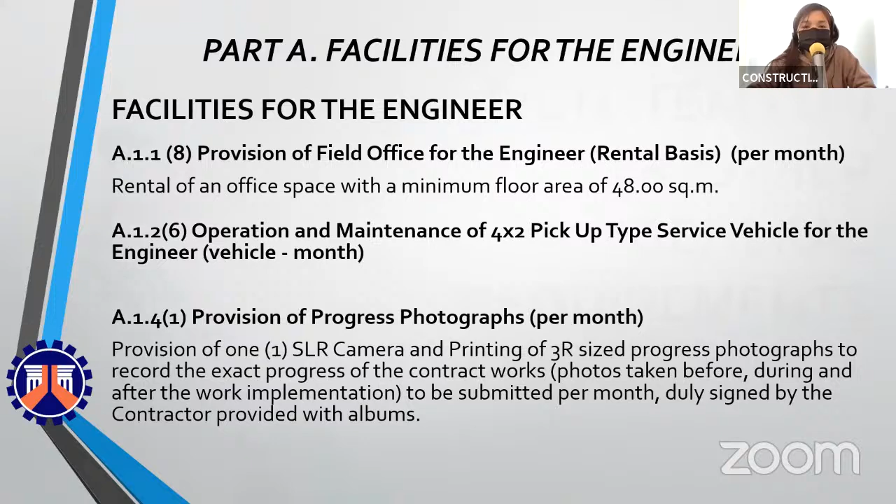Common items in Part B, other general requirements: B.31, permits and clearances per contract ID number 23D00221 and 24D00104; B.51, project billboard, signboard, each; B.71, occupational safety and health program per month.

B.81, traffic management month per contract ID numbers 24D119 and 24D120; B.9, mobilization, demobilization, lump sum; B.20, temporary fence per contract ID number 24D104; B.24.1, general scaffolding, shoring, and netting per contract ID 24D104.

Showing you the DPWH standard project billboard.

Minimum material testing equipment for small contractors per contract ID numbers 23D222, 23D223, 23D224, and 24D120. Showing you the minimum materials testing equipment for small contractors.

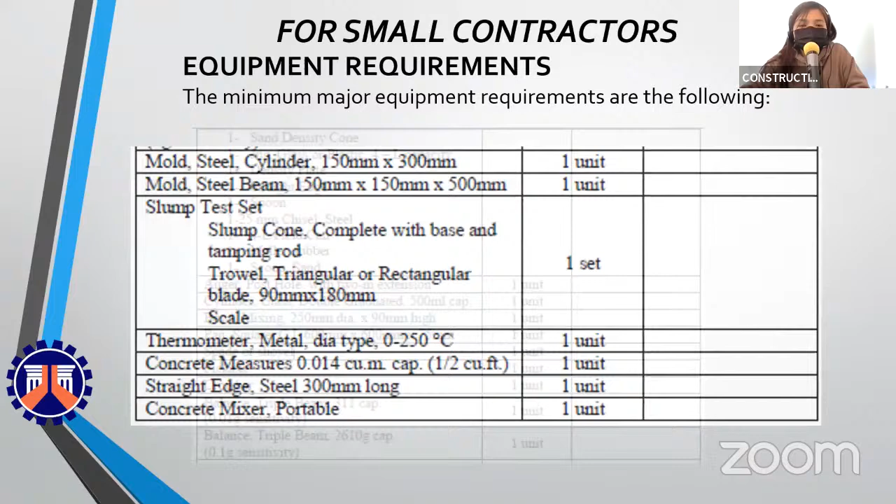For minimum material testing equipment for medium contractors, per contract ID numbers 23D221, 24D104, and 24D119. Showing you the minimum materials testing equipment for medium contractors.

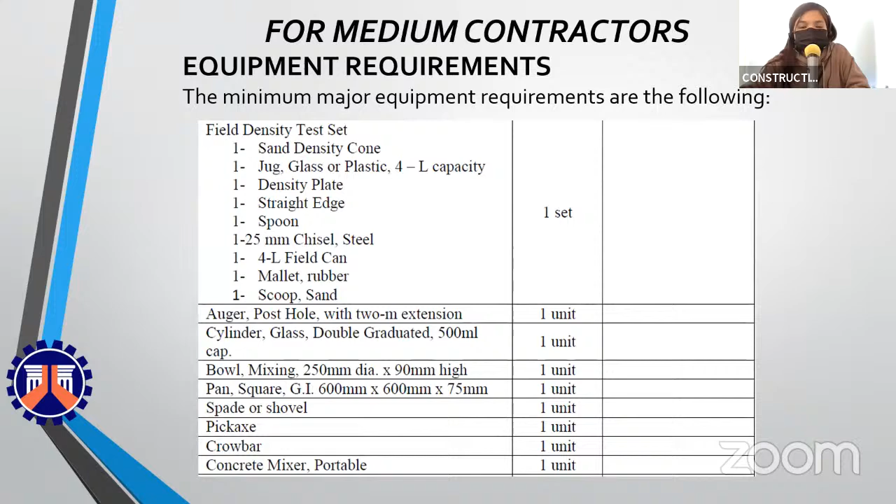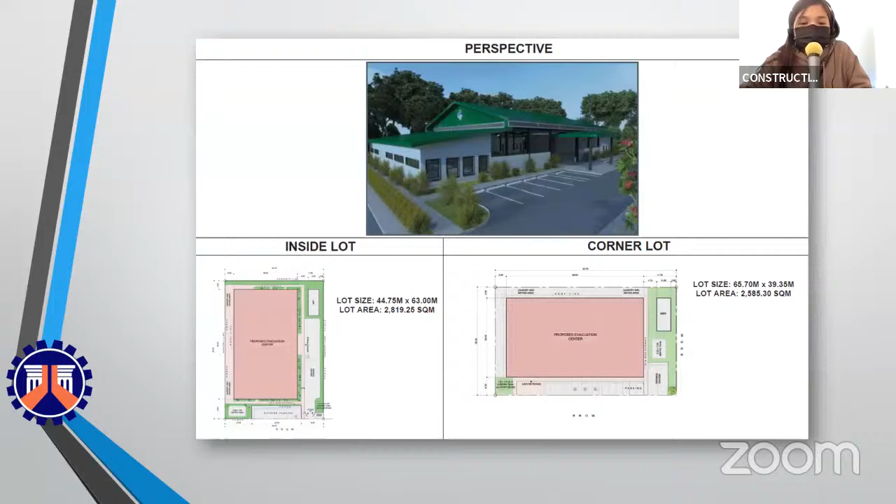Per contract ID number 23D00221, showing you the perspective and the plan for inside lot and corner lot. Ground floor plan.

Scope of work. The construction project entails the development of a permanent evacuation center or multipurpose covered court incorporating various facilities and features, including a laundry and drying area, material recovery facility, cistern tank, mess hall equipped with a kitchen, administrative office, storage area, and a play area, accompanied by a breastfeeding room. Additionally, the project will integrate a conjugal space, distinct male and female toilet and bath facilities with accommodations for persons with disabilities, a clinic, and a prayer room.

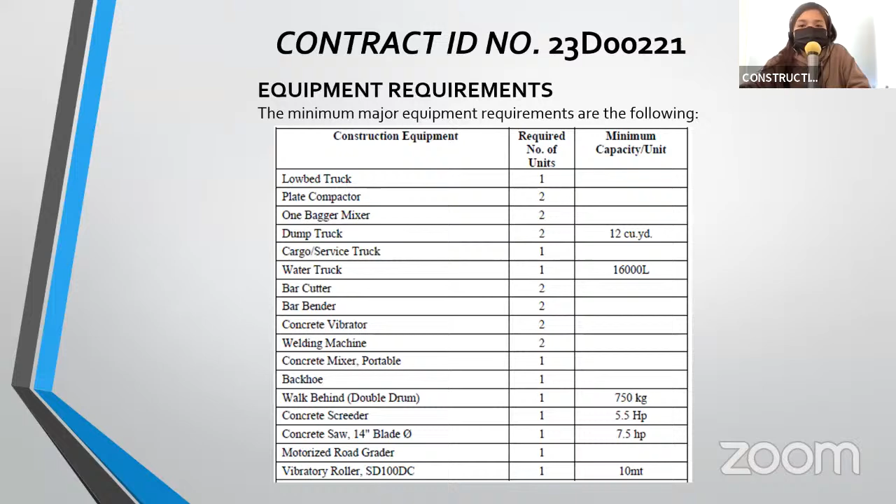Moreover, the project will be enhanced with a fire protection system. Equipment requirements. Showing you the minimum major equipment requirements. Manpower requirements.

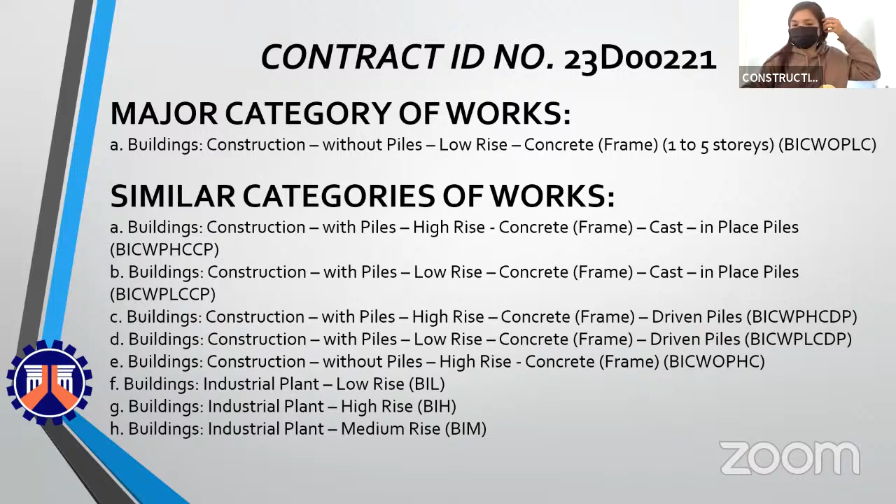The minimum work experience requirements for the key personnel are the following. The approved budget for the contract is 42,554,475 pesos and 98 cents. The contract duration is 240 calendar days. Showing you the major category of works and similar categories of works. The source of fund is FY 2023 RA 11936, extended regular 2023 continuing.

For contract ID number 23D00222, for structural improvement and construction of evacuation centers in General Nakar, Quezon. Showing you the perspective, inside lot and corner lot. Ground floor plan.

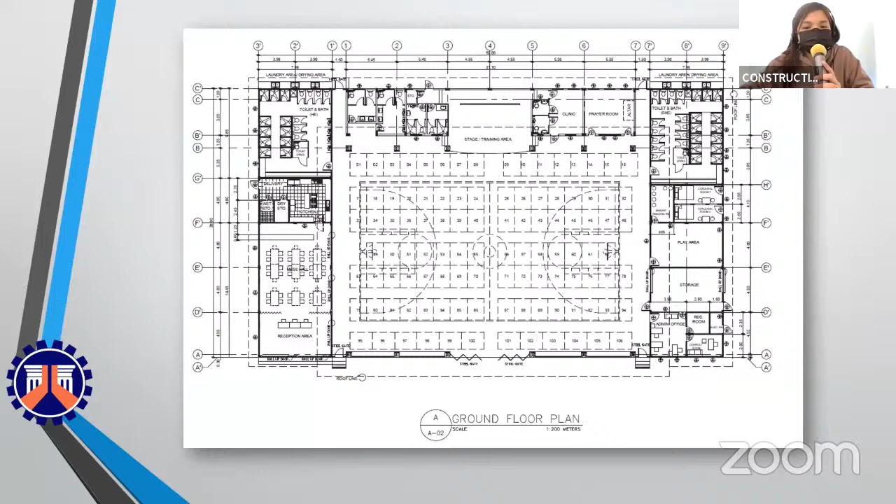Scope of work. The scope of works includes architectural finishes such as painting both exterior and interior walls, installing both glazed and unglazed tiles, applying a non-slip paint finish to the floor, and installing lighting fixtures. Setting up a ceiling using fiber cement board on a metal frame, installing reflective insulation, and laying Portland cement concrete pavement. Additionally, installation of a fire protection system and a generator set with a dedicated generator room are included.

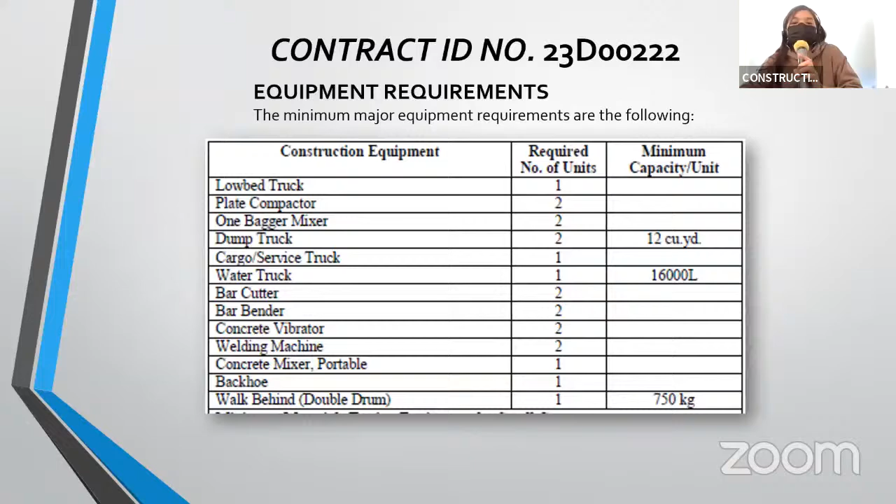Equipment requirements. The minimum major equipment requirements are the following.

Manpower requirements: the minimum work experience requirements for the key personnel are the following. The approved budget for the contract is 9,278,452 pesos and 71 cents. The contract duration is 120 calendar days.

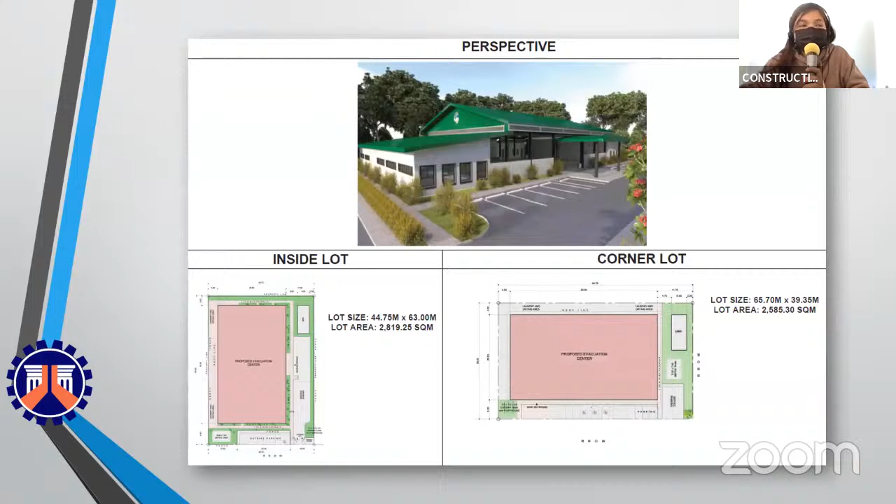Showing you the major categories of works and similar categories of works. The source of fund is FY 2023 RA 11936, extended regular 2023, continuing. For contract ID number 23D00223, structural improvement of public buildings and construction of evacuation centers, Padre Garcia, Batangas. Showing you the perspective, inside lot, and corner lot, and the ground floor plan.

Scope of work: the scope of works includes architectural finishes such as painting both exterior and interior walls, installing both glazed and unglazed tiles, applying a non-slip paint finish to the floor, and installing lighting fixtures, setting up a ceiling using fiber cement board on a metal frame, installing reflective insulation, and laying PCCP. Additionally, installation of a fire protection system and a generator set with a dedicated generator room are included.

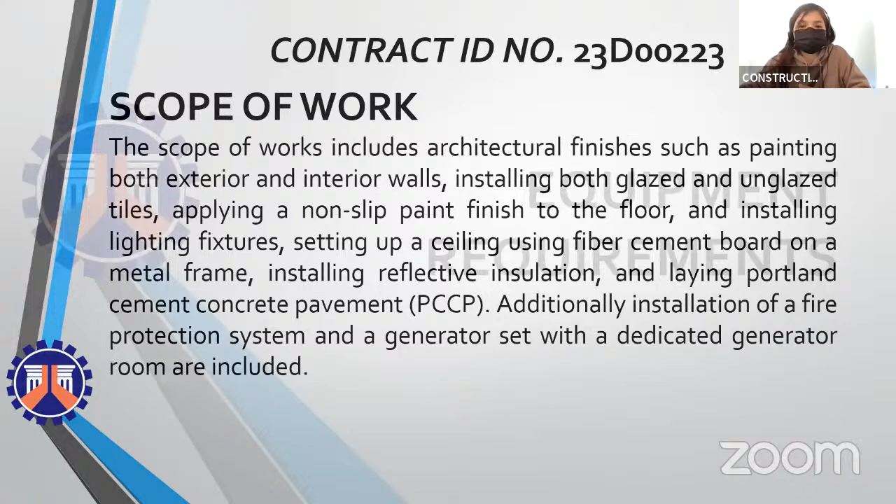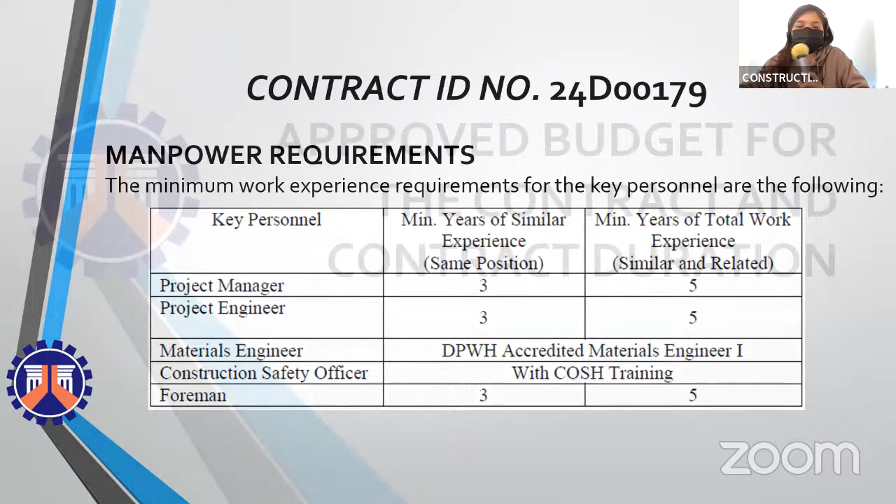Showing you the minimum major equipment requirements. Manpower requirements: the minimum work experience requirements for the key personnel are the following. The approved budget for the contract is 8,032,964.92. The contract duration is 120 calendar days.

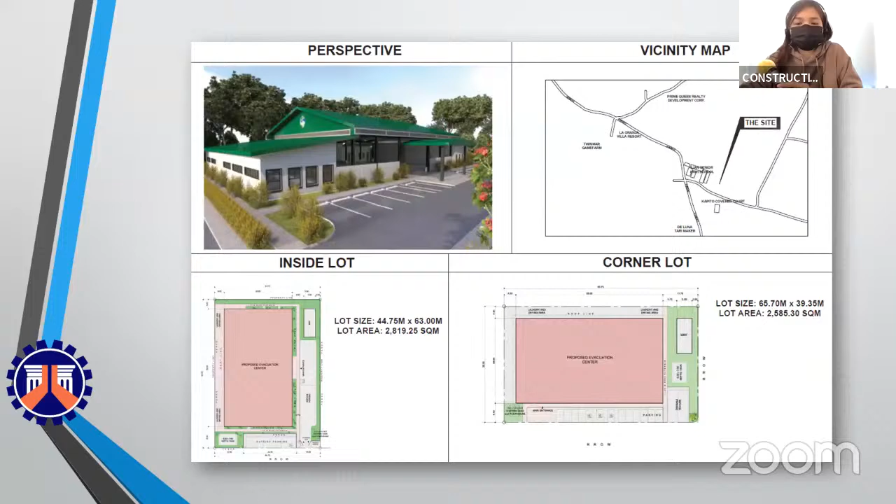Showing you the major categories of works and similar categories of works. The source of fund is FY 2023 RA 11936, extended regular 2023, continuing. For contract ID number 23D00224, structural improvement of public buildings and construction of evacuation centers, Lian, Batangas. Showing you the perspective, vicinity map, inside lot, and corner lot, and the ground floor plan.

The scope of work includes architectural finishes such as painting both exterior and interior walls, installing both glazed and unglazed tiles, applying a non-slip paint finish to the floor, and electrical works such as installing lighting fixtures, panel board, and wirings. Setting up a ceiling using fiber cement board on a metal frame, installing reflective insulation, and laying portland cement concrete pavement. Additionally, installation of a fire protection system and a generator set with a dedicated generator room are included.

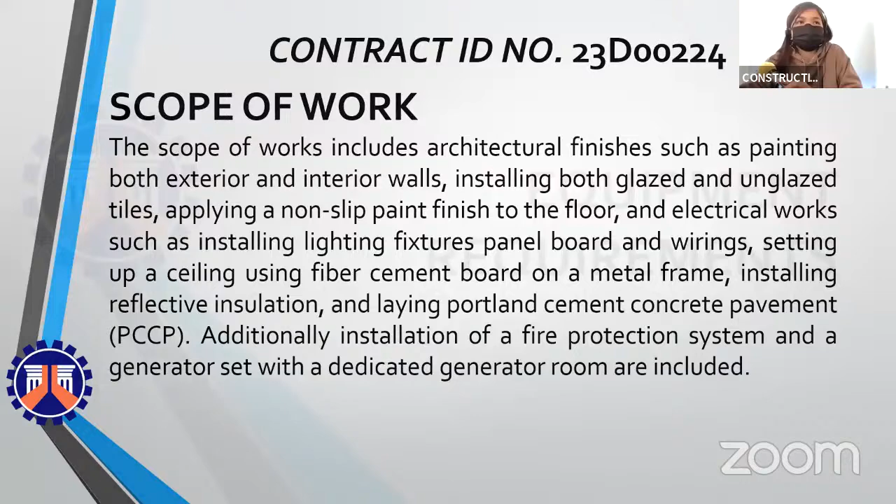Equipment requirements: the minimum major equipment requirements are the following. Manpower requirements: the minimum work experience requirements for the key personnel are the following. The approved budget for the contract is 7,741,041 pesos and 39 cents. The contract duration is 120 calendar days.

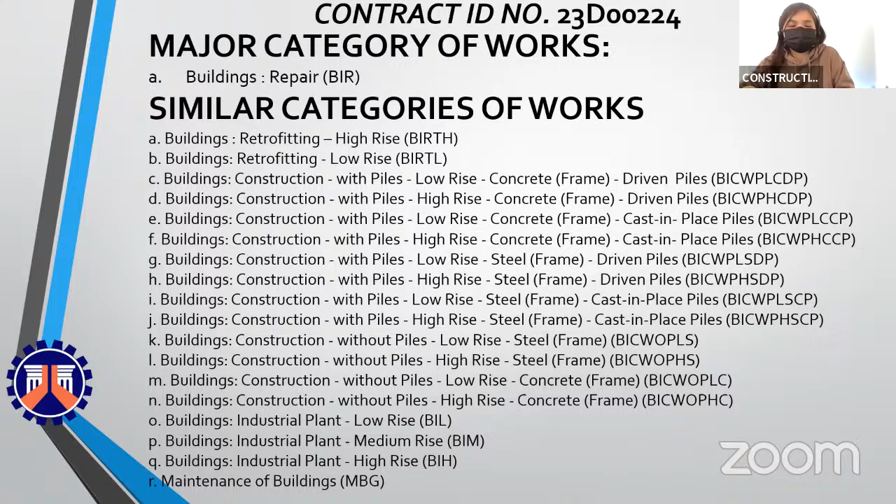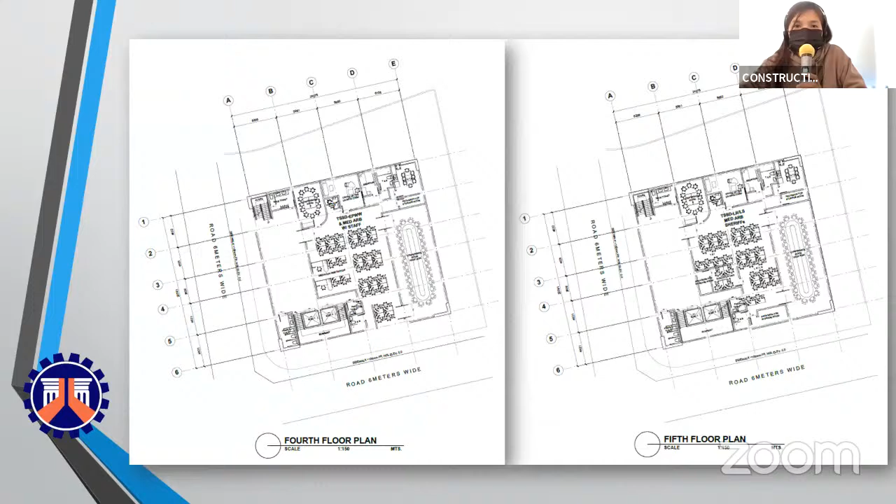Showing you the major categories of works and similar categories of works. The source of fund is FY 2023 RA 11936, extended regular 2023, continuing. For contract ID number 24D104, the construction of DOLE Regional Office IV-A building in Cabuyao City, Laguna. Showing you the basement plan, ground floor plan, second and third floor plan, fourth and fifth floor plan, sixth floor plan and roof plan.

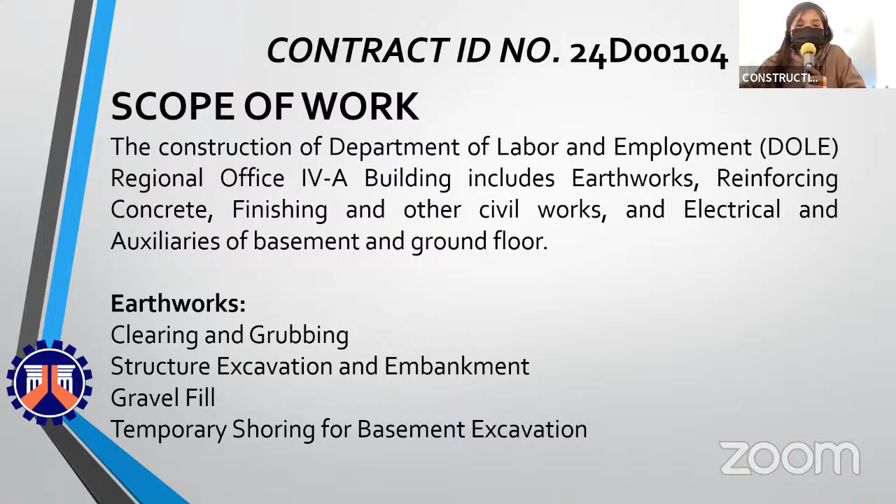Scope of work: the construction of Department of Labor and Employment Regional Office IV-A Building includes earthworks, reinforcing concrete, finishing and other civil works, electrical and auxiliaries of basement and ground floor. For earthworks: clearing and grubbing, structure excavation and embankment, gravel fill, temporary shoring for basement excavation. Mat foundation, shear wall, retaining wall, basement and ground floor columns and beams, ground floor slab.

For plumbing: septic tank and cistern tank, basement floor and ground floor sanitary line and water line, rough-ins. For electrical: basement floor and ground floor electrical rough-ins.

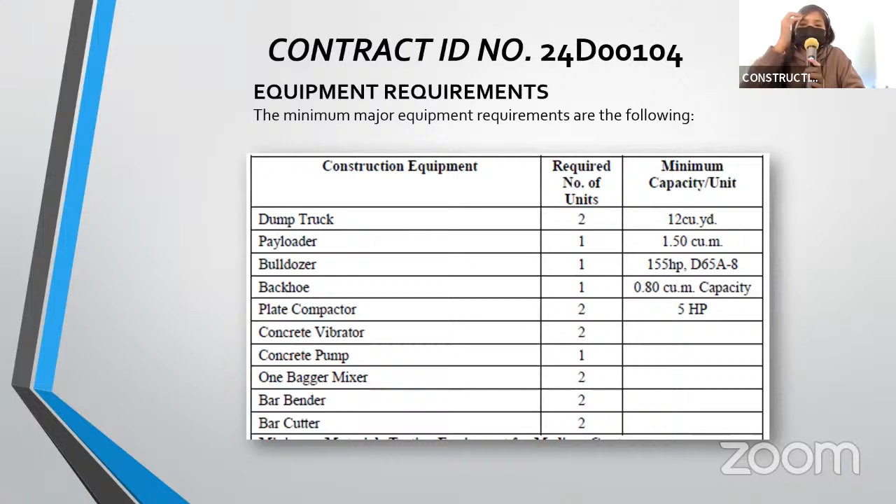Equipment requirements: the minimum major equipment requirements are the following. Manpower requirements: the minimum work experience requirements for the key personnel are the following. The approved budget for the contract is 48,250,000 pesos, and the contract duration is 300 calendar days.

Showing you the major category of works and similar categories of works. The source of fund is FY 2024 GAA for DPWH Infra Program. For contract ID number 24D00119, Daang Maharlika LZ K0135 plus -475 to K135 plus -315 and K135 plus -268 to K135 plus 596.

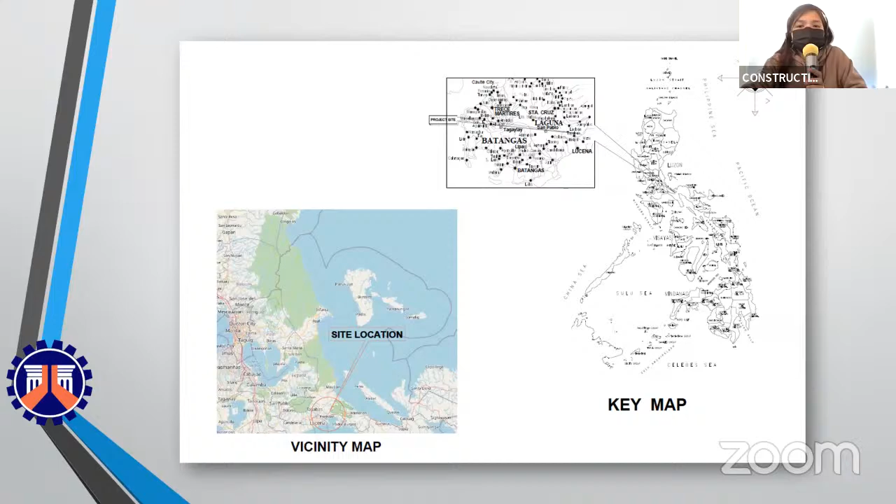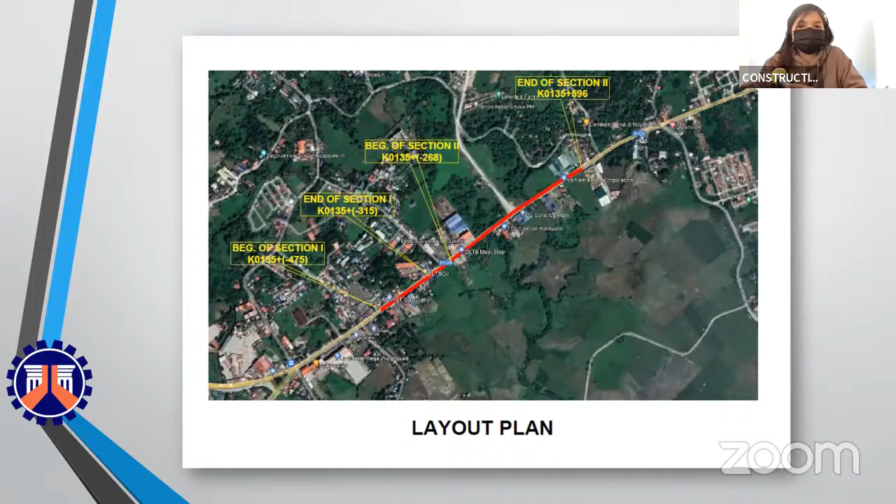Showing you the vicinity map and key map, the layout plan, and the typical roadway section.

Scope of work: asphalt overlay of two-lane road, emulsified asphalt, bituminous concrete surface wearing course, hot laid, bituminous concrete surface binder course, hot laid, bituminous concrete surface with anti-rutting additive, hot laid, and installation of reflectorized thermoplastic pavement markings, white and yellow.

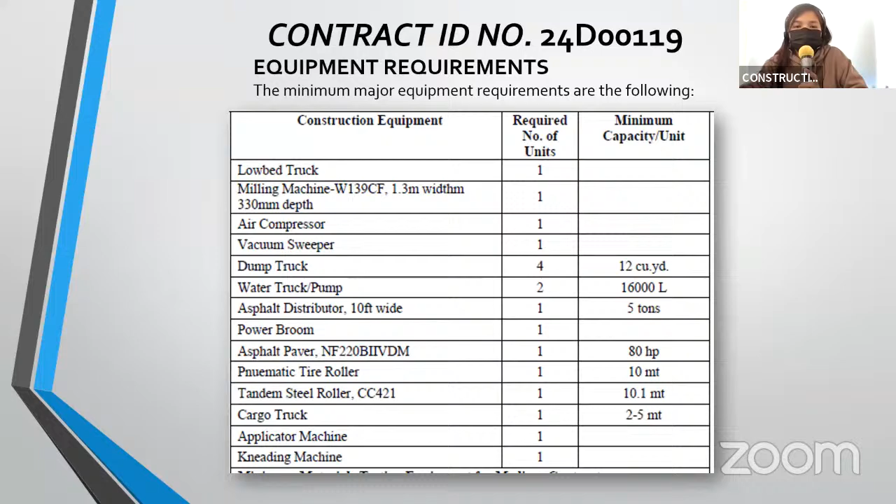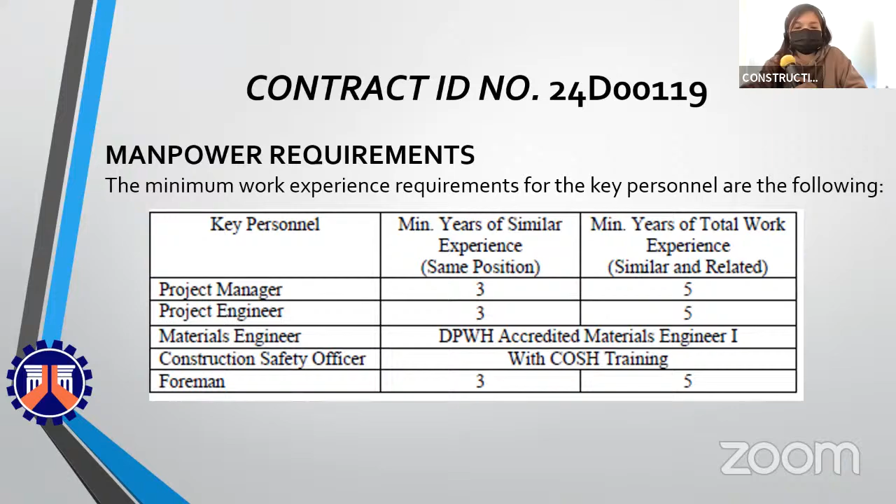Equipment requirements: the minimum major equipment requirements are the following. Manpower requirements: the minimum work experience requirements for the key personnel are the following. The approved budget for the contract is 42,742,745 pesos, and the contract duration is 120 calendar days. Showing you the major category of works and similar category of works.

The source of fund is FY 2024 GAA for DPWH Infra Program. For contract ID number 24D00120, Daang Maharlika LZ, kilometer 140 plus 527 to kilometer 140 plus 950.

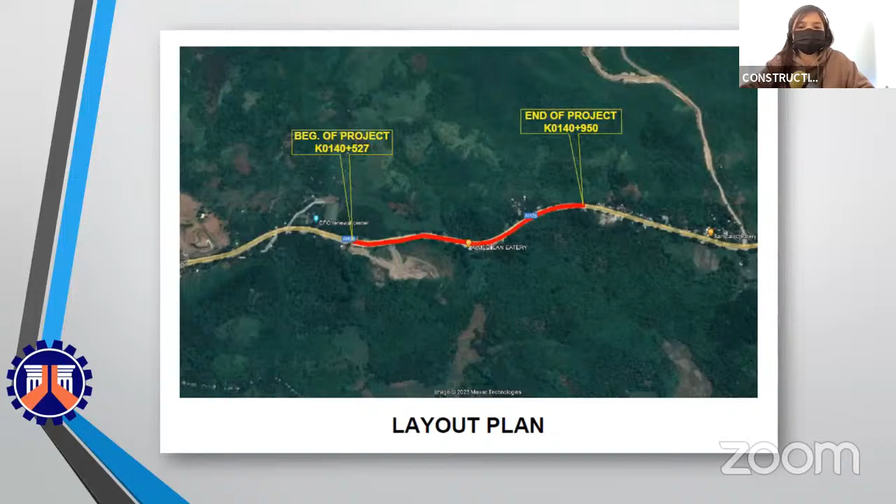Showing you the vicinity map and key map, layout plan, and typical roadway section.

Scope of work: asphalt overlay of two-lane road, emulsified asphalt, bituminous concrete surface wearing course hot laid, bituminous concrete surface binder course hot laid, bituminous concrete surface with anti-rutting additive hot laid, and installation of reflectorized thermoplastic pavement markings, white and yellow.

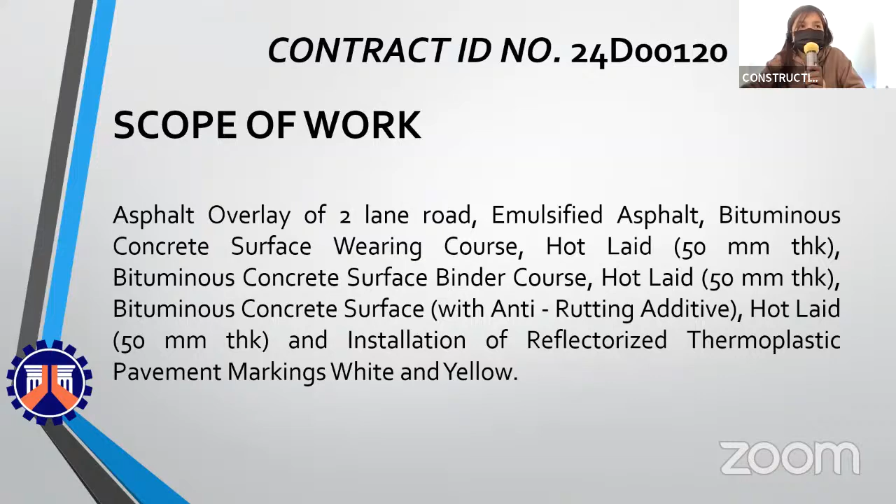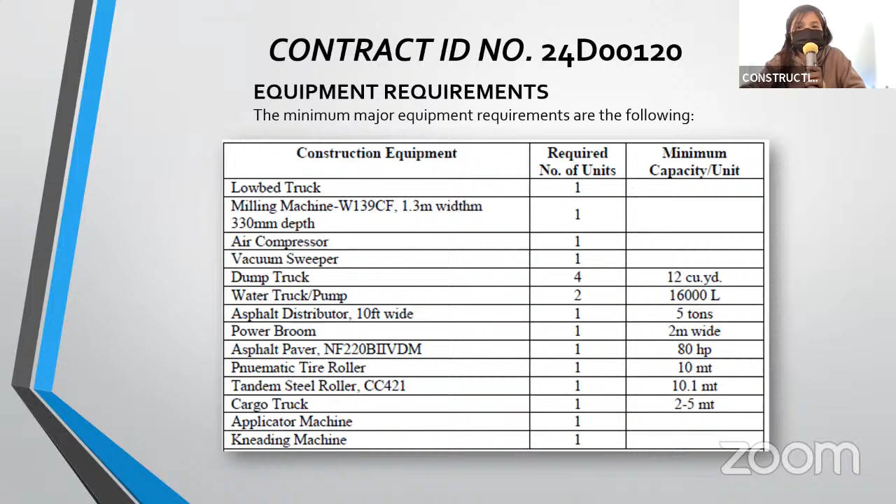That's all, thank you. For the legal and financial specifications, it will be discussed later together with the other projects.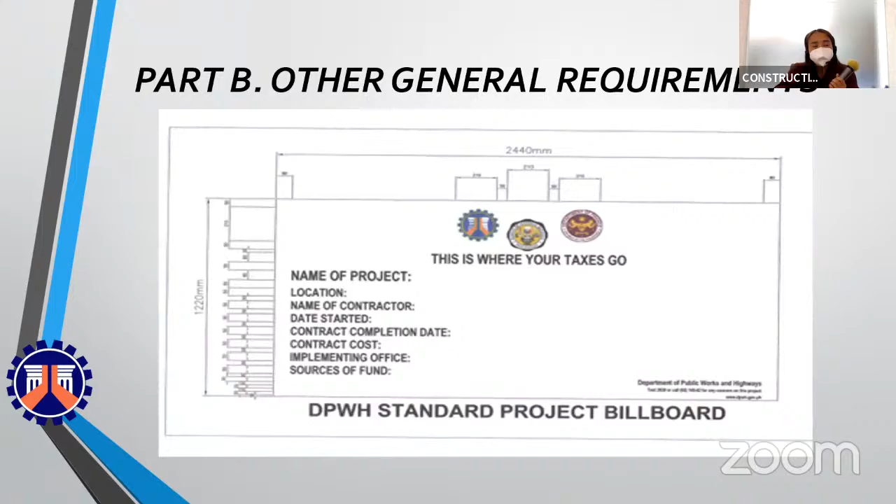Minimum material testing equipment for medium contractors for contract ID numbers 24D0216, 217, 218, 224, 228, and 24D0230.

The minimum major equipment requirements are the following.

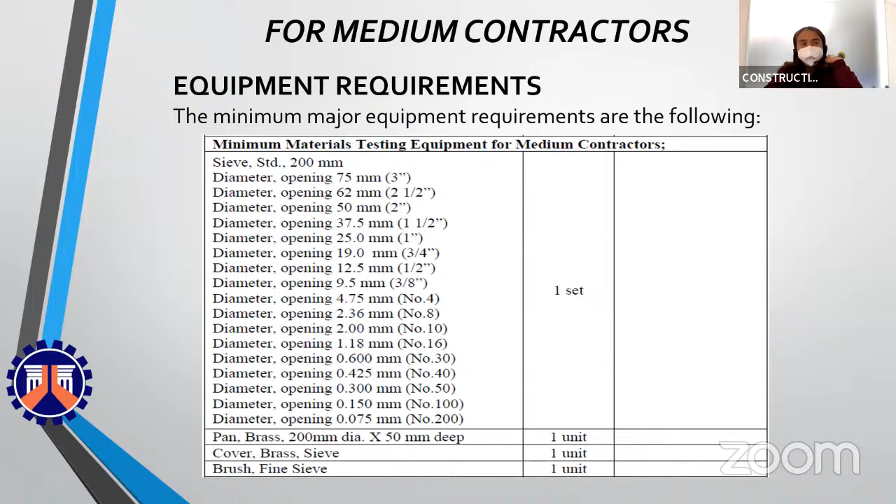Contract ID number 24D00216. Construction of flood control structure and other improvements, Barangay Molino 6 to Barangay San Nicolas 3, Bacoor, Cavite.

Showing you the key map, Calabarzon map, vicinity map, and location map.

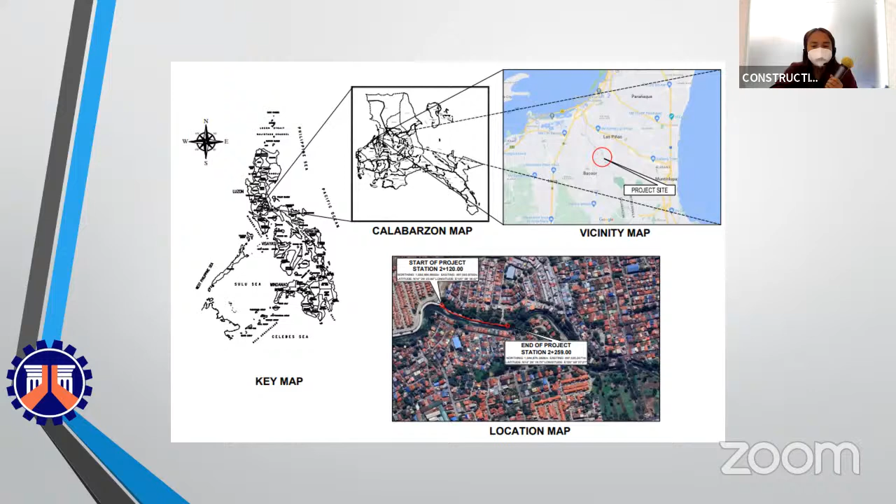For the scope of work: construction of 0.5 meter thick, 4.70 meter height reinforced concrete retaining wall with 100 millimeter diameter PVC weep holes spaced at every 2 meter on center staggered, supported by 2.9 meter by 0.9 meter reinforced concrete foundation with 9 meter steel sheet piles, type 2, then construction of 0.28 meter thick PCC pavement with 0.15 meter thick aggregate subbase course, and construction of temporary diversion of waterway and craneway.

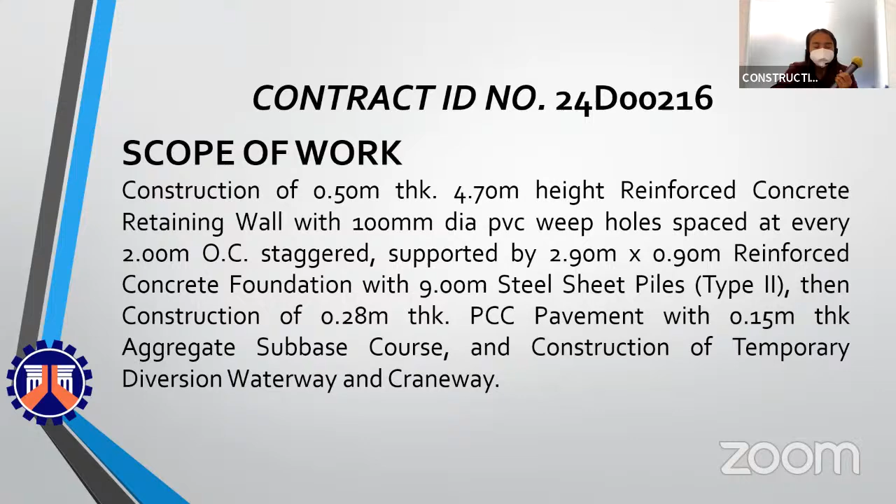Minimum major equipment requirements are the following.

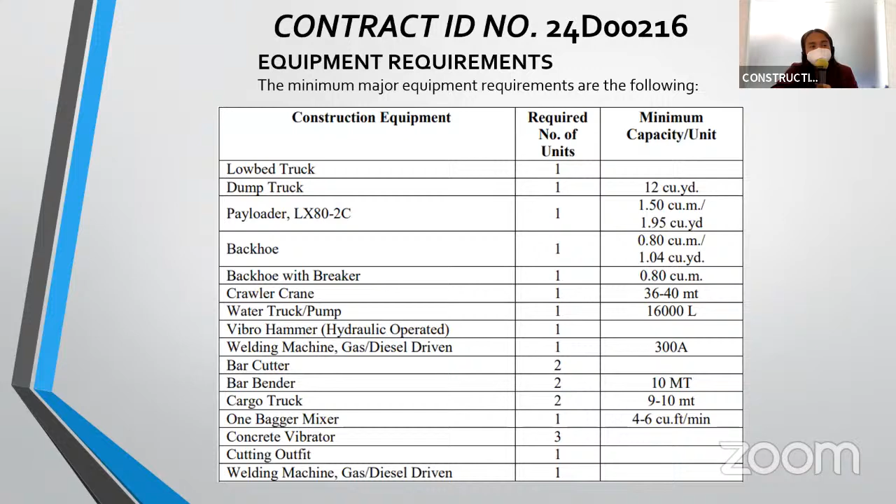For the manpower requirements: project manager, project engineer, and foreman should have at least 3 years of similar experience with the same position and 5 years of total work experience with similar and related position. Materials engineer must be a DPWH accredited materials engineer 1, construction safety officer with COSH training.

Approved budget for the contract is 35,640,000 pesos. Contract duration is 195 calendar days.

Major category of works: flood control, construction of slope protection using structural measures. Examples are revetment, retaining structures, and wire net. Showing you the similar categories of works.

The source of fund is FY 2024 GAA for DPWH Infra Program.

Contract ID number 24D00217. Construction of flood control structure, road and other improvements including box culvert, Barangay Palico 4, Imus, Cavite.

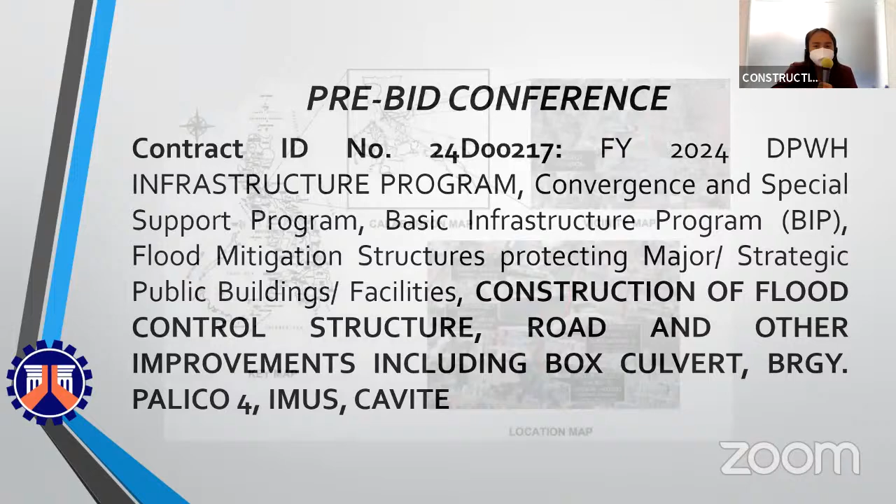Showing you the key map, Calabarzon map, vicinity map, and location map.

Typical section, edge beam blow-up details, PCCP blow-up details, parapet wall and pile cap blow-up details, and typical reinforcement details.

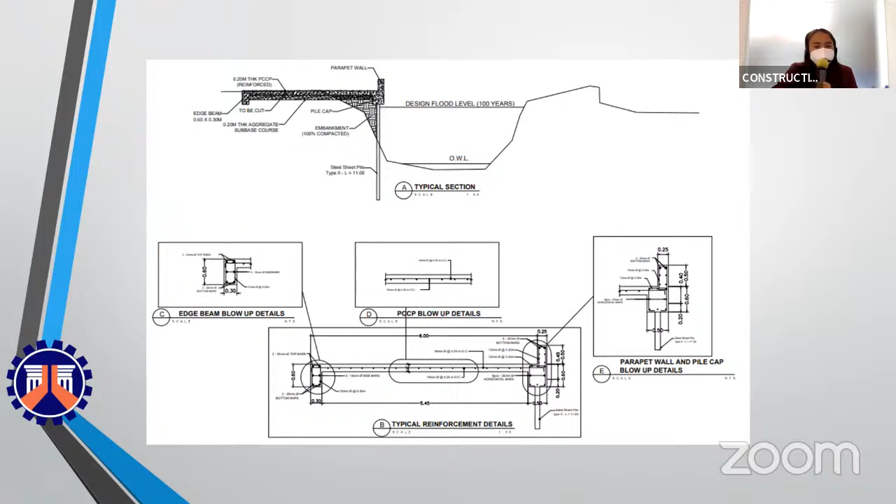Scope of work: construction of 0.25 meter by 0.5 meter parapet wall and 0.5 by 0.6 meter pile cap, supported by type 2 steel sheet pile, length of 11 meters. Construction of 0.2 meter thick Portland cement concrete pavement, reinforced with 0.2 meter thick aggregate sub-base course and 0.3 by 0.6 meter edge beam.

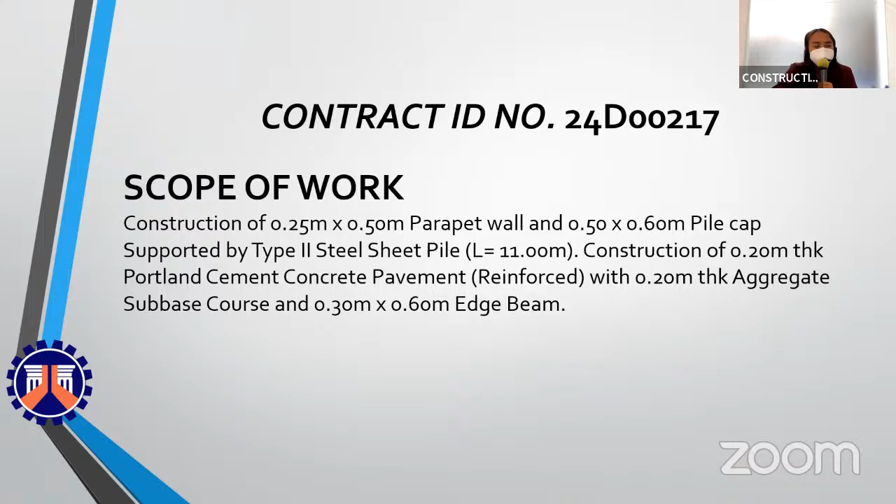The minimum major equipment requirements for the following. The minimum work experience requirements for the key personnel are the following.

Approved budget for the contract is 59,400,000 pesos. Contract duration is 225 calendar days.

Major category of works: flood control, construction of slope protection using structural measures. Examples are revetment, retaining structures, and wire net. Showing you the similar categories of works.

The source of fund is FY 2024 GAA for DPWH Infra Program.

Contract ID number 24D00218. Construction of revetment along Cañas River, Barangay Tejero, General Trias, Cavite.

Showing you the key map, Calabarzon map, vicinity map, and layout plan.

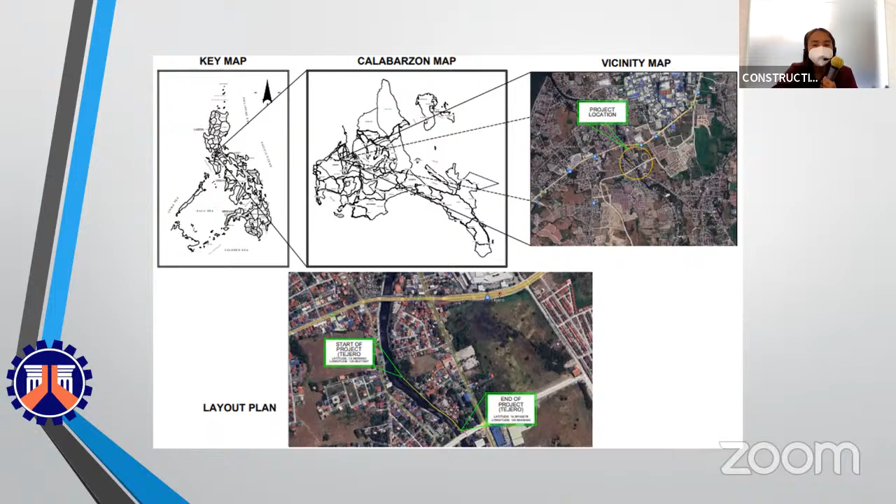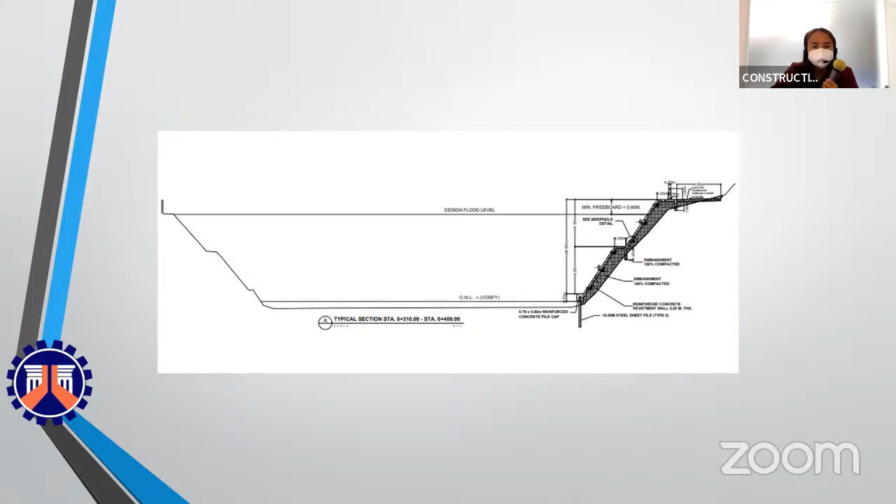Typical section at station 0+460 to station 0+620, residential area. And typical section at station 0+400 to station 0+440. Typical section at station 0+310 to station 0+400. Typical section reinforcement detail.

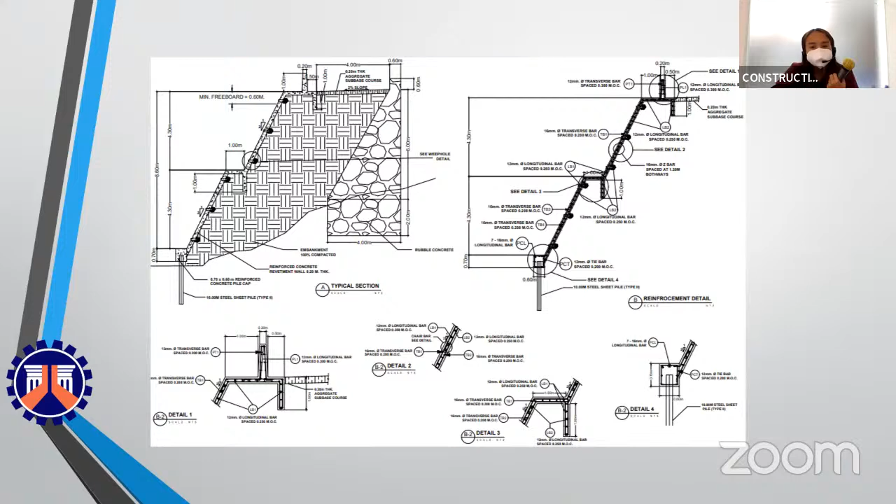Typical section, rubble concrete details, and detail of weep holes.

Scope of work is construction of reinforced concrete revetment of 0.2 meter thick, supported by 0.7 by 0.6 meter pile cap with 12 meter type 2 steel sheet pile. Construction of 6 meter height, 4 meter width rubble concrete for residential areas with 100 millimeter diameter PVC weep holes spaced every 1.5 meter on center, staggered, and 0.2 meter thick aggregate sub-base course with 4.0 meter width.

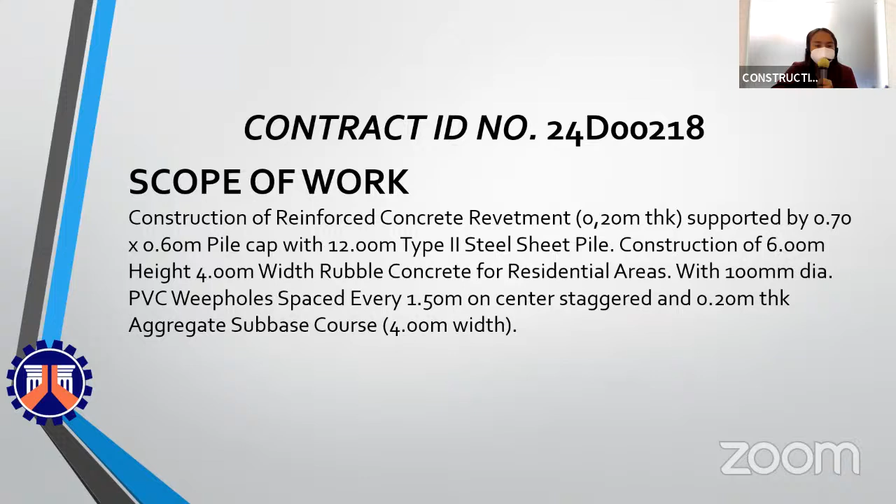The minimum major equipment requirements are the following.

The minimum work experience requirements for the key personnel are the following.

Approved budget for the contract is 84,528,210 pesos. Contract duration is 300 calendar days.

Major category of works, flood control, construction of slope protection using structural measures. Showing you the similar categories of works.

The source of fund is FY 2024 GAA for DPWH Infra Program. Contract ID number 24D00224. Construction of flood control structure and other improvements at Bacoor side, Zapote River upstream, Daang Hari to Amore, Bacoor side, Bacoor, Cavite.

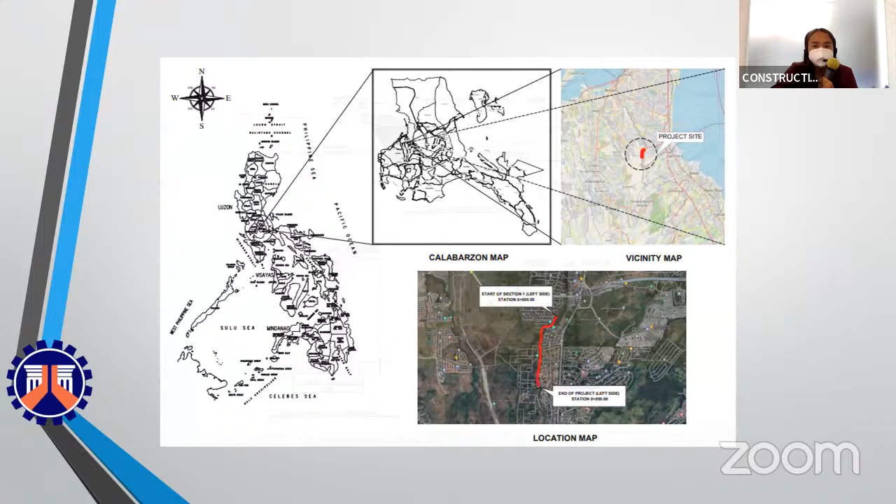Showing you the Calabarzon map, vicinity map, and location map. Typical cross-section, details of retaining wall, and reinforcement details of retaining wall.

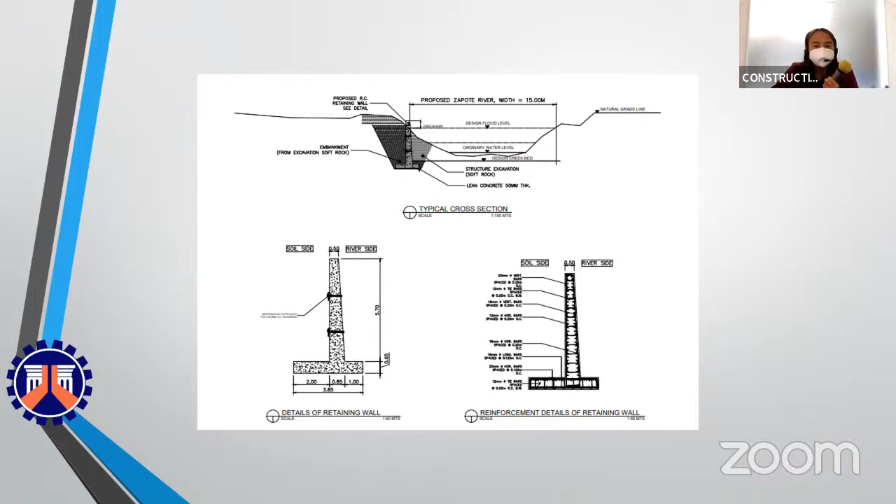Scope of work, construction of 0.5 meter thick, 5.7 meter high reinforced concrete retaining wall with 100 millimeter diameter PVC weep holes spaced every 2 meter on center staggered, supported by 3.85 meter by 0.65 meter reinforced concrete foundation.

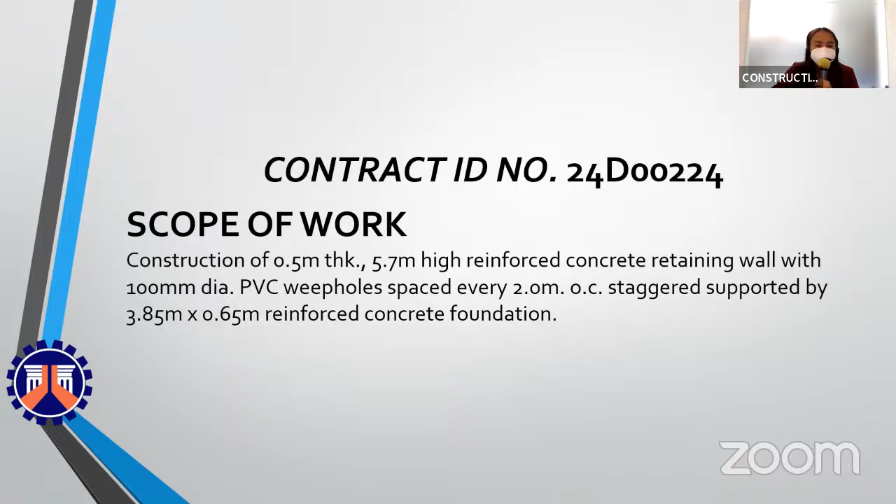The minimum major equipment requirements are the following.

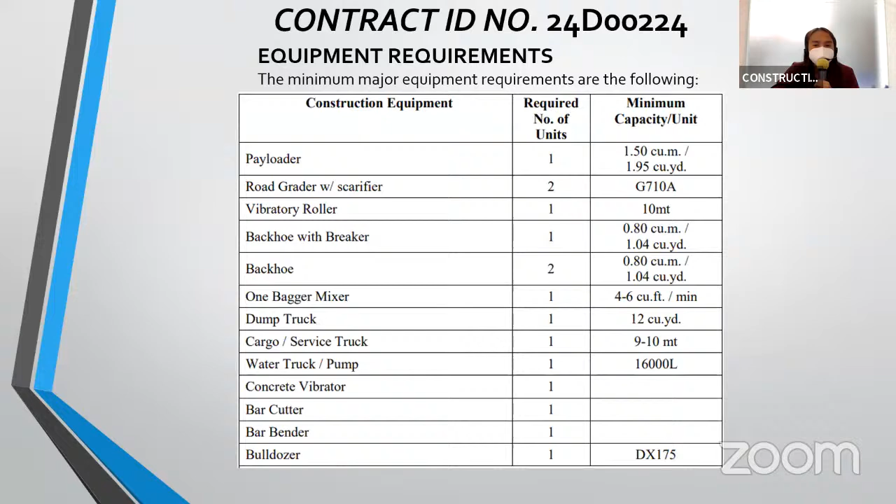Approved budget for the contract is 148,500,000 pesos. Contract duration is 300 calendar days.

The source of fund is FY 2024 GAA for DPWH Infra Program. 24D0228, construction of Carmona Slope Protection Works along Carmona-Binion River, Carmona, Cavite.

Scope of work, construction of 200 millimeter thick reinforced concrete revetment with a height of 9.7 meters with 1 meter parapet wall, resting on 0.5 meter by 0.7 meter reinforced concrete pile cap with 6 meters type 2 U-type steel sheet pile and earthworks.

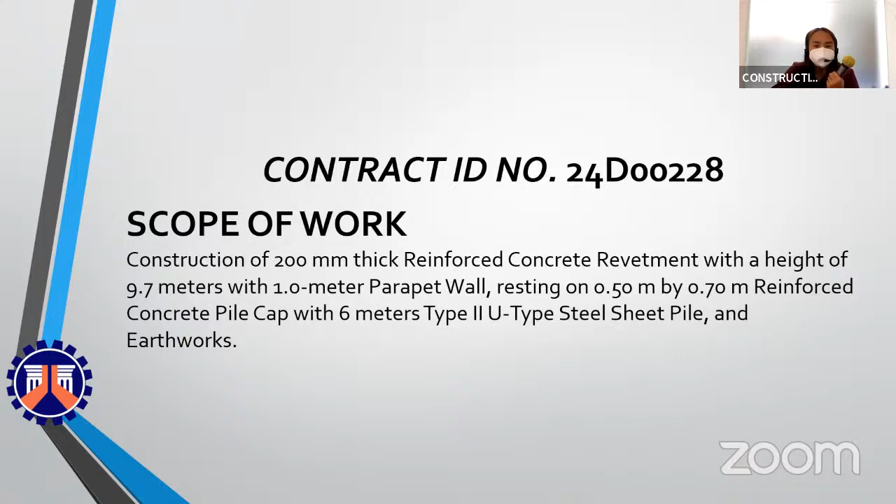Approved budget for the contract is 72,375,000 pesos. Contract duration is 270 calendar days.

The source of fund is FY 2024 GAA for DPWH Infra Program. Contract ID number 24D0230, construction of flood control structure, road and other improvements, Barangay San Nicolas 3 to Barangay San Nicolas 1, Bacoor, Cavite.

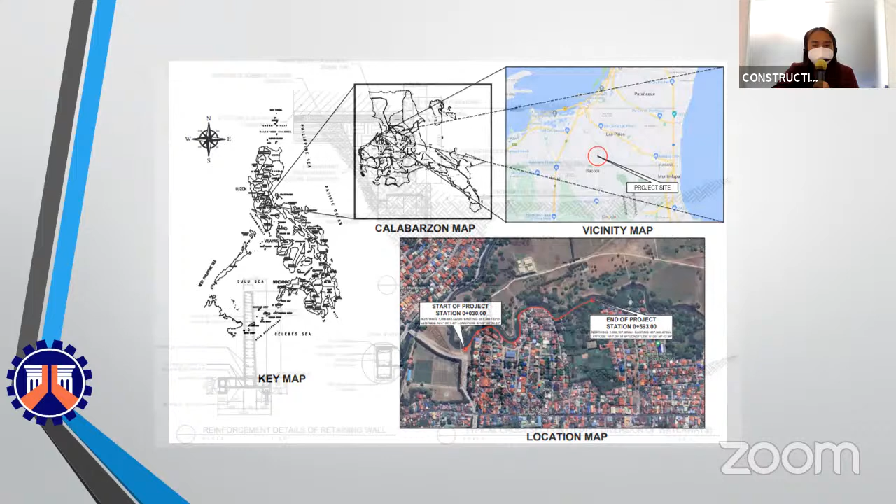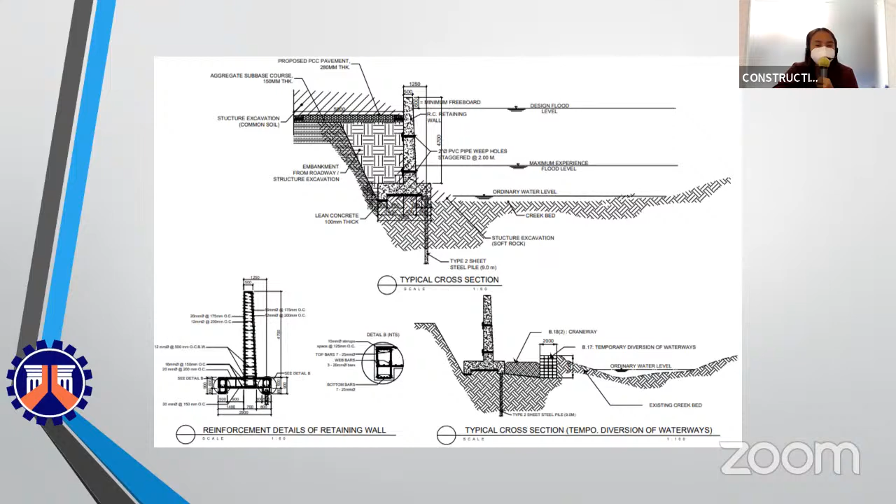Showing you the key map, Calabarzon map, vicinity map, and location map. Typical cross-section, reinforcement details of retaining wall, and typical cross-section of temporary diversion of waterways. Reinforced concrete wall section at every 40-meter construction joint, water stop detail, and steel sheet pile detail.

Scope of work: construction of 0.5-meter thick, 4.7-meter height reinforced concrete retaining wall with 100-millimeter diameter PVC weep holes spaced every 2-meter on center staggered, supported by 2.9-meter by 0.9-meter reinforced concrete foundation with 9-meter steel sheet piles, type 2. Then construction of 0.28-meter thick PCC pavement with 0.15-meter thick aggregate sub-base course, and construction of temporary diversion waterway and craneway.

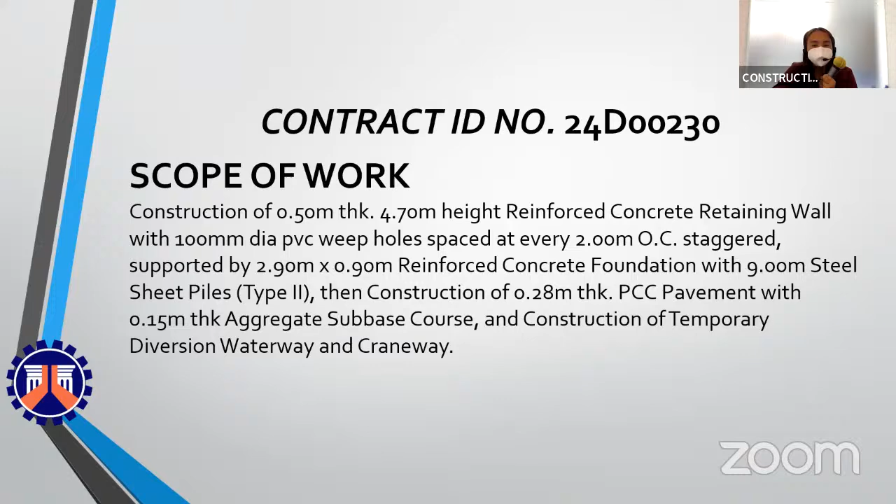Approved budget for the contract is 136,620,000 pesos. Contract duration is 270 calendar days.

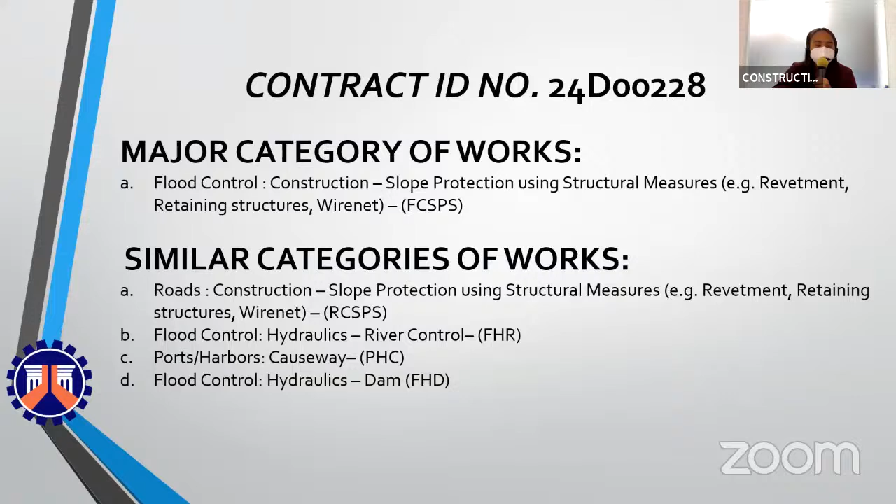Major category of works: flood control, construction of slope protection using structural measures. Showing you the similar categories of works.

The source of fund is the FY 2024 GAA for DPWH Infra Program. That's all for the projects implemented by the Construction Division.

May contract ba to be implemented by maintenance?

While waiting for the response, let me acknowledge some of our board members attending. We have Engineer Marisa Alcuzar from QAHD.

Good morning po. Good morning to everyone. He is a board regular member for all types of procurement, and Engineer Jeffrey Michael Hamias from the Maintenance Division, Implementing Unit for Maintenance Projects. Ma'am, good morning, Sir, po.

Ma'am, yung construction implemented po, yung nahuling diniscuss ni Engineer Makalalat, yun ang i-implement na maintenance po. Okay, so it's a combination ng maintenance at construction. Yung naunang present po maintenance, itong nahuli, yun ang amin o yung construction. Okay, thank you, Sir Bobby, for the information.

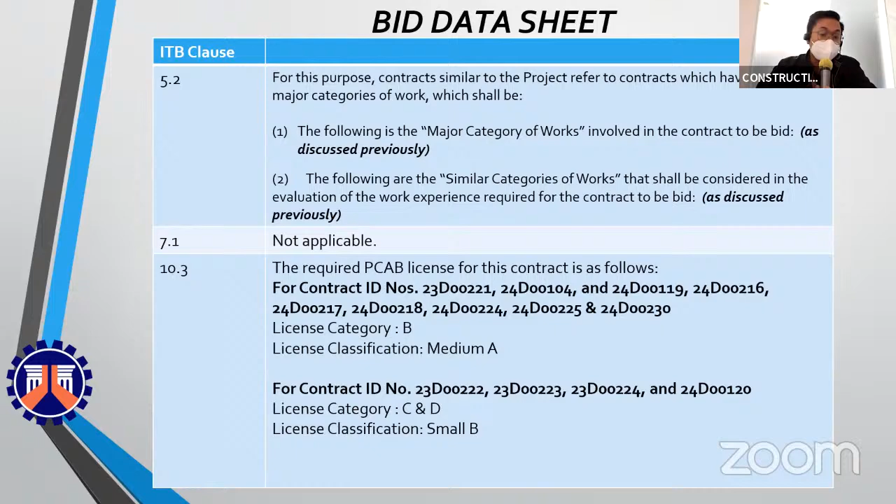ITB Clause 22, bid submission may be done manually or electronically or online. However, bidders should only select one mode of submission, either manual or electronic. The address of receipt of bids submitted manually is at the bidding room, DPWH Region 4A, Canlubang Interchange, Barangay Mayapa, City of Calamba, Laguna, and electronically should be submitted at electronicbids_R4A at dpwh.gov.ph. The deadline for receipt of bids is on April 23, 2024 at 10 a.m.

for contract ID numbers 23D00221, 222, 223, and 23D00224, 24D00104, 119, and 24D00120. The deadline for the receipt of bids on April 24, 2024 at 10 a.m. for contract ID numbers 24D00216, 217, 218, 224, 225, and 24D00230.

For bids to be submitted electronically or online, the following procedures should be observed following the Department Order Number 87 Series of 2020.

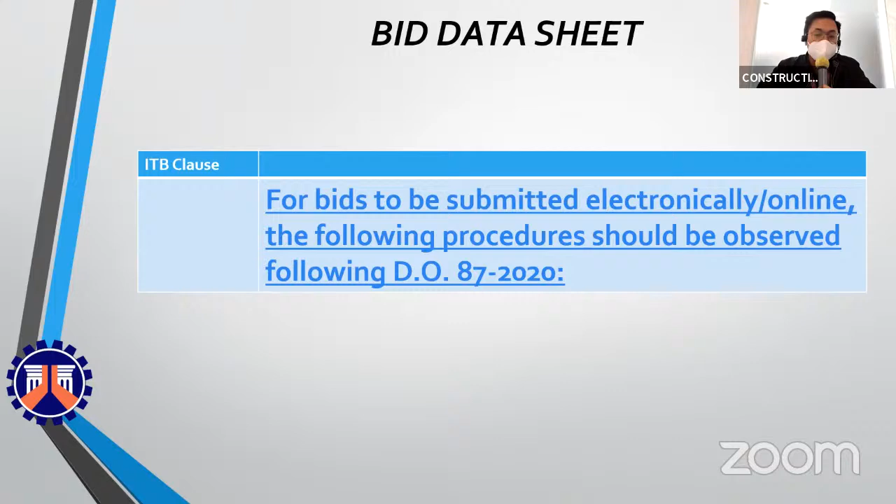GCC Clause 4.1. The procuring entity shall give possession of the site to the contractor upon receipt of the notice to proceed. The start date should not be later than 7 calendar days from the issuance date of the receipt of the notice to proceed.

GCC Clause 7.2. In case of semi-permanent structures such as buildings of types 1, 2, and 3 as classified under the National Building Code of the Philippines, concrete asphalt roads, concrete river control, drainage, irrigation line canals, river landing, deep wells, rock causeway, pedestrian overpass, and other similar semi-permanent structures, 5 years, for contract ID numbers 24D00119, 120, 216, 217, 218, 224, 225, and 24D0230.

And in case of permanent structures such as buildings of types 4 and 5 as classified under the National Building Code of the Philippines, and other structures made of steel, iron, concrete which comply with relevant structural codes, such as but not limited to steel concrete bridges, flyovers, aircraft movement areas, ports, dams, tunnels, filtration and treatment plants, sewerage systems, power plants, transmission and communication towers, railway system, and other similar permanent structures, 15 years, for contract ID numbers 23D00221, 23D00222, 23D00223, 23D00224, and 24D00104.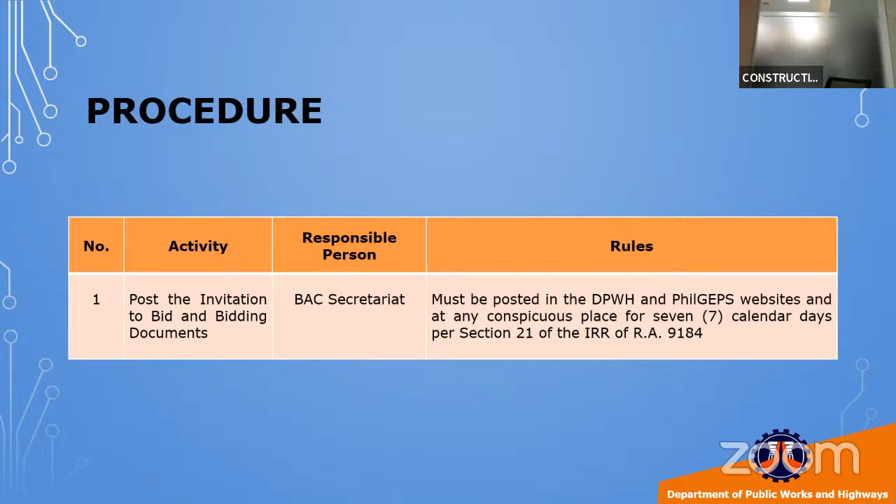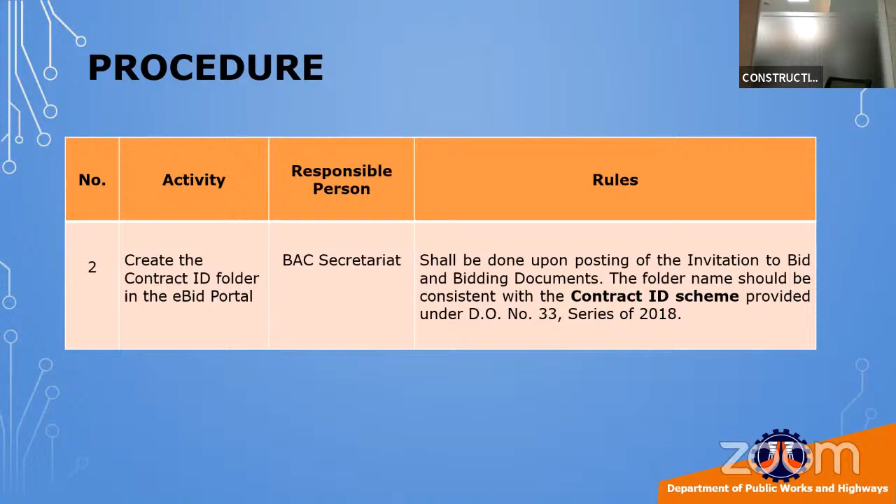Upon posting of the invitation to bid and bidding documents, the Bids and Awards Committee (BAC) Secretariat shall create the contract ID folder in the eBid portal. This is the DPWH Electronic Bid Submission and Receipt portal. This is the contract ID folder created by the BAC Secretariat in the eBid portal.

The contractor shall purchase the bidding documents per Section 17.4 and Appendix 8, Guidelines on the Sale of Bidding Documents of the IRR of RA 9184. The applicable fee for the specific project is indicated in the invitation to bid.

Prior to the deadline of submission of bids, the prospective bidders shall send an email with subject 'Official Receipt for Contract ID' to electronicbids_R4A@dpwh.gov.ph. Attached to the said email is the copy of the official receipt of purchase of bidding documents in PDF format.

The file name should be in the format PCAB ID_contract ID_official receipt.pdf. For example, the file name of the attached PDF containing the official receipt of the contractor with PCAB ID number 12345 who intends to participate in the bidding of contract ID number 21D00001 shall be 12345_21D00001_official receipt.pdf. Further, the email subject would be 'Official Receipt for 21D00001'.

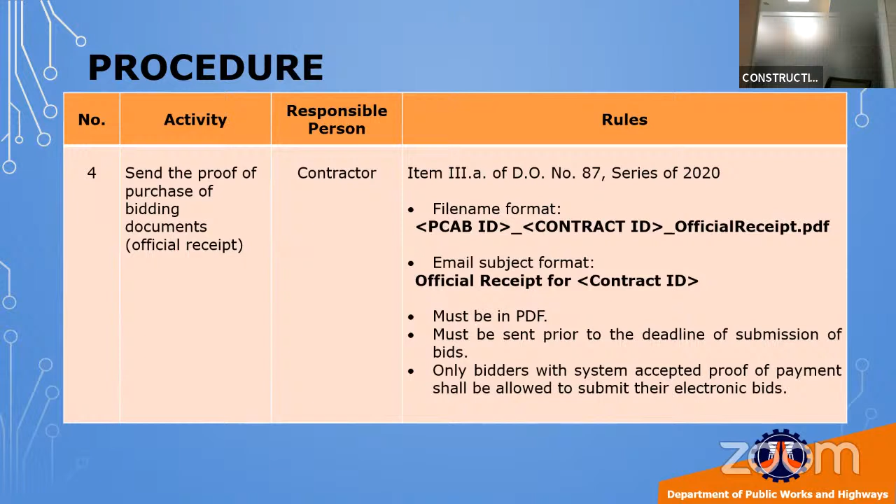Upon submission of electronic proof of purchase of bidding documents or the OR, the contractor may now send its electronic bid with file name format PCAB ID_contract ID_bid.zip or .rar or .7z, with email subject format 'Bid Submission for Contract ID'. Its bid must be in a password-protected archive format and shall contain 2 password-protected archive files, the technical and financial proposal.

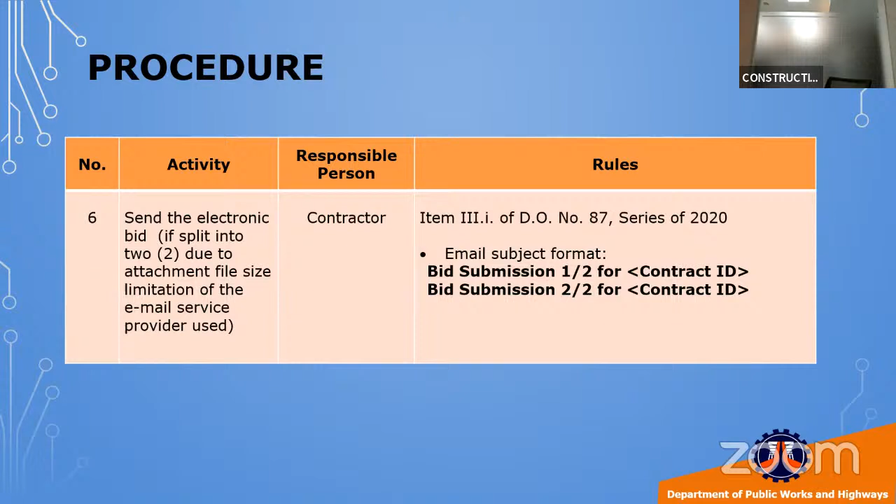The email submitting the prospective bidder's electronic bid should have a subject in the format 'Bid Submission for Contract ID'. In case of multiple compressed archive main file folders, it shall be submitted in multiple emails, each with subject in the format 'Bid Submission 1/2 for Contract ID', 'Bid Submission 2/2 for Contract ID'.

If a bidder wishes to modify its electronic bid, he may do so following the procedures in the manual submission of bid, or he may choose to submit his modification electronically in the same format prescribed in the preparation and submission of an electronic bid, except that the subject of the email submitting the bid modification shall be labeled 'Bid Modification X for Contract ID', where X represents the number of bid modifications submitted.

For example, the subject of an email submitting a first bid modification for contract ID number 21D00001 should be 'Bid Modification 1 for 21D00001'.

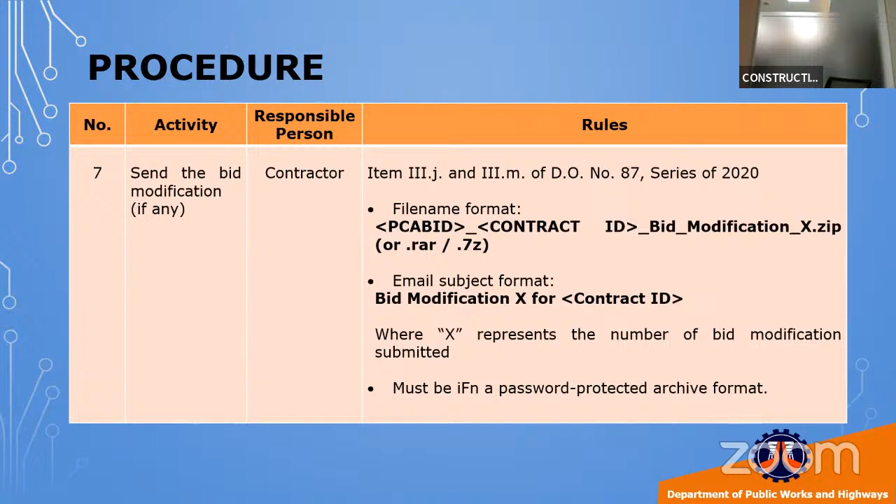This is the same in the prescribed format in the preparation and submission of electronic bid, except that the bid modification main archive file folder shall be labeled as PCAB ID_contract ID_bid modification_X.zip or .rar or .7z.

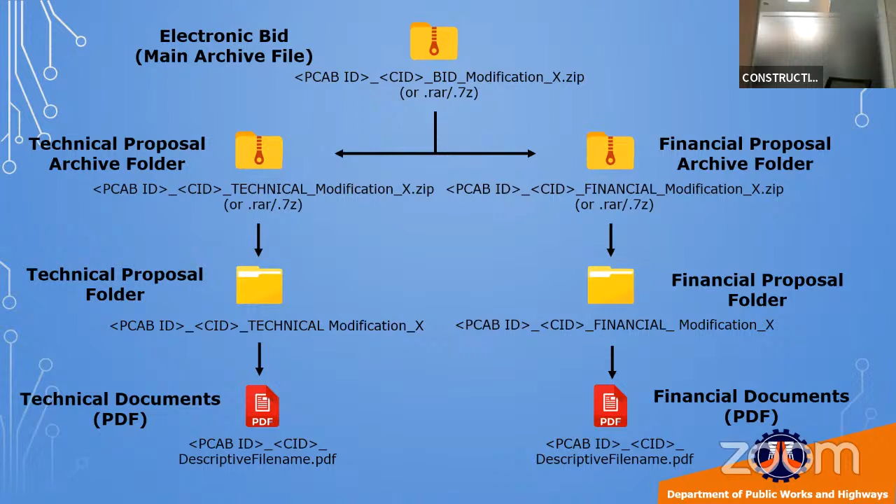In case a prospective bidder who purchased a bidding document decides not to participate, he may submit his letter of non-participation manually or electronically. For electronic submission, the contractor shall send an email with the subject 'Non-participation for Contract ID' with the letter of non-participation attached, file named PCAB ID_ContractID_non-participation.pdf. This email should be sent to electronicbids_R4A@dpwh.gov.ph before the deadline for bid submission.

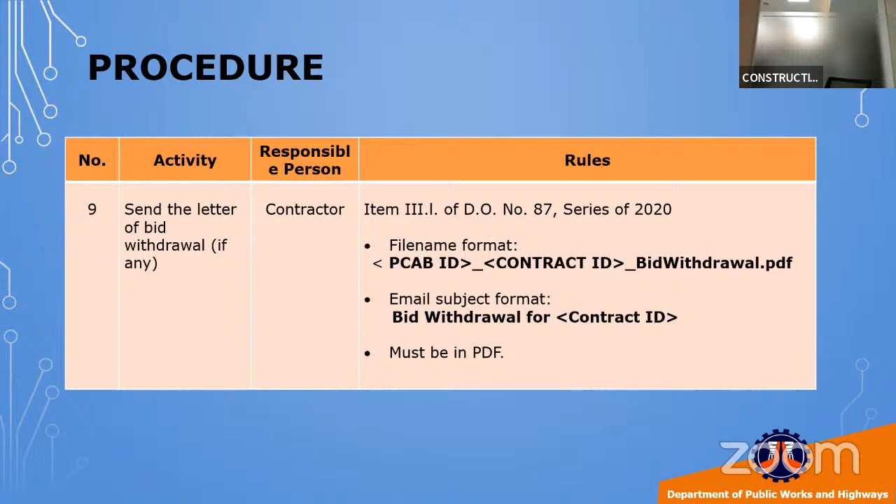Bids may only be withdrawn prior to the deadline for bid submission. In case of withdrawal of an electronic bid, the bidder shall send an email with the subject 'Bid Withdrawal for Contract ID' with the letter of bid withdrawal in PDF format attached, file named PCAB ID_ContractID_bid withdrawal.pdf. This email should be sent to electronicbids_R4A@dpwh.gov.ph before the deadline for bid submission.

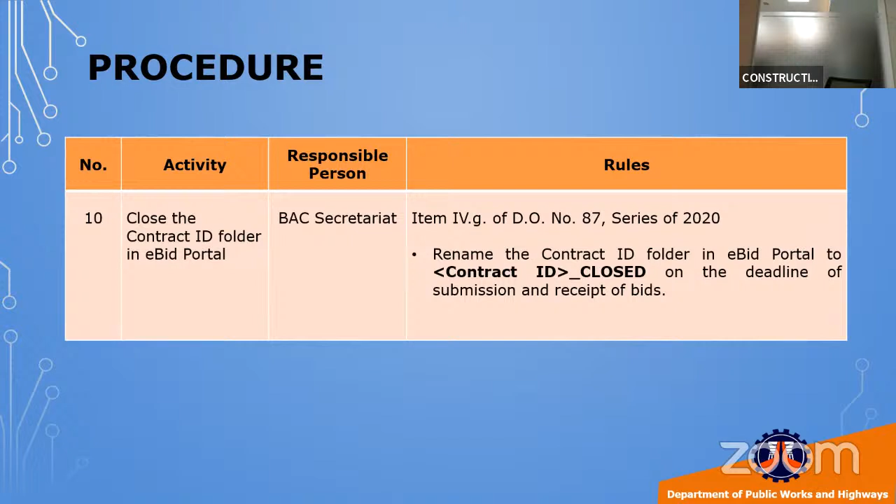The BAC Secretariat shall close the Contract ID folder in the eBid portal on the deadline of submission and receipt of bids. This is the closed Contract ID folder in the eBid portal. The BAC Secretariat shall download the bids from the eBid portal to the local computer.

Only during the actual opening of bids shall the bidder disclose the passwords for his electronic bid. This can be done by the bidder's authorized representative verbally in person, through phone call, online platforms, or through writing. In all cases, the bidder will have only 3 attempts or 15 minutes, whichever comes first, to provide the correct password. Otherwise, the bidder shall be disqualified except in unforeseen justifiable circumstances. The bidder may also be subjected to the 3-strike policy as warranted by the circumstances.

If the bidder chooses to disclose the password through phone call, he should make sure that the contact numbers as recorded in the Civil Works Application are open when the BAC calls to ask for the password. The bidder may also choose to call the BAC number during the bid opening time and wait for the opening of his bid to disclose the password.

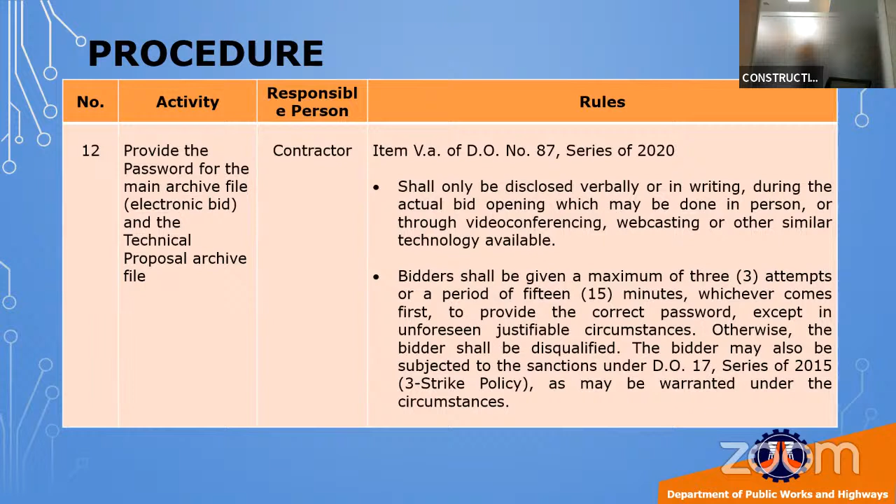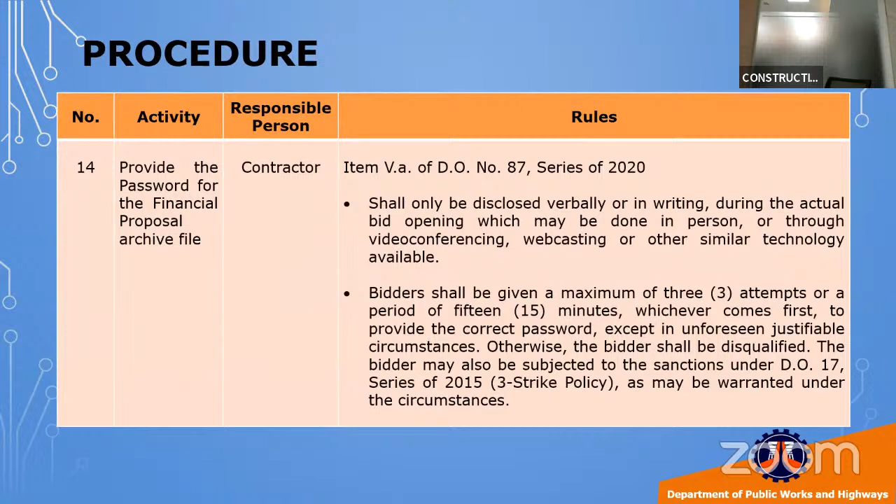All electronic bids' password-protected compressed archive main file folders shall be opened first for the opening of the technical component compressed archive file folders. This shall be followed by the opening of the bids submitted manually, for the opening of the technical component envelopes. The same procedures apply for the financial component compressed archive file folders and financial component envelopes. The BAC Secretariat shall open the financial proposal archive file.

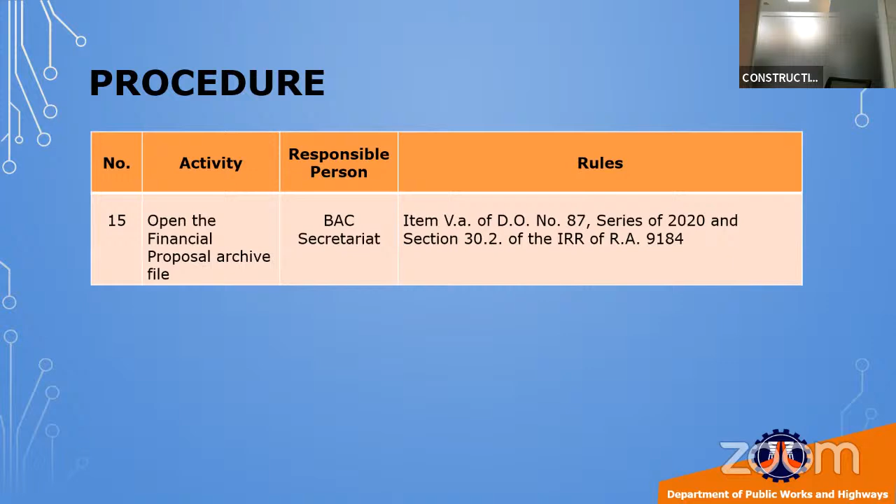Notes and reminders for the contractors in the preparation and submission of bids.

Only bidders with system-accepted proof of payment shall be allowed to submit their electronic bids, which shall not be beyond the deadline specified for submission of bids. An email shall also be received by a prospective bidder in instances where their sent email related to the submission of electronic OR or purchase of bidding documents has an incorrect subject contract ID, meaning a corresponding folder with the same contract ID does not exist in the eBid portal; if it has no attachment; if it has an attachment but not in the prescribed format; if it has more than one attachment; or if it was received after the deadline of bid submission. For these cases, prospective bidders should rectify or correct the noted deficiencies to comply with the requirements for their electronic bid to be accepted.

The bidders must submit their electronic bid using the registered email address in the Civil Works Application. In case prospective bidders are not yet registered in the CWA, they can use any email address subject to verification by the BAC Secretariat.

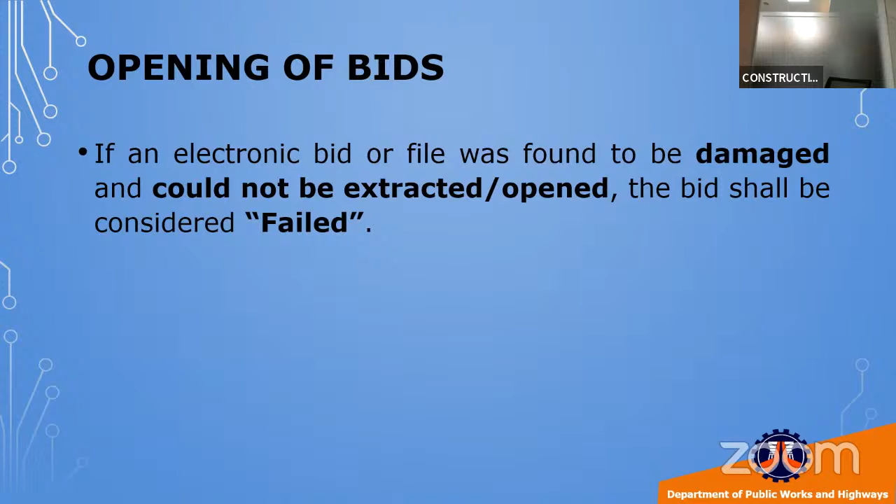If an electronic bid or file was found to be damaged and could not be extracted or opened, the bid shall be considered failed.

Notes and reminders for non-participation and bid withdrawal. In case of non-participation and withdrawal of bids, the BAC Secretariat shall check the letters of non-participation and bid withdrawal received in the dedicated email address and stored in the eBid portal, and shall observe the provisions under Section 26.2 of the IRR of RA 9184 and DO 17 Series of 2015.